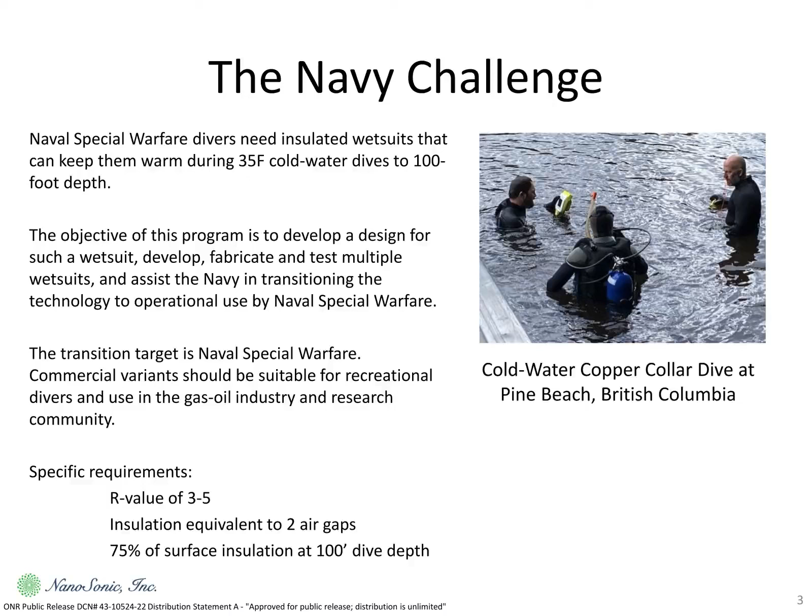Our specific requirements are an effective R value, thermal insulation equivalent to 2 air gaps within the suit, and an insulation value at 100-foot dive depth set equal to about 75% of that at the surface.

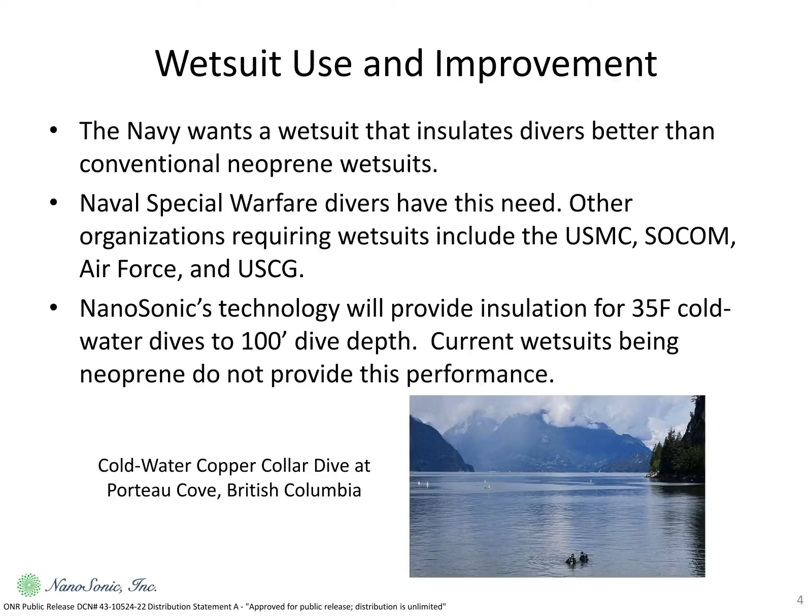So Navy divers need wetsuits that insulate better than conventional neoprene wetsuits. Navy Special Warfare divers have this need, but other organizations requiring wetsuits include the Marine Corps, SOCOM, Air Force, and the Coast Guard. Our technology, NanoSonic's technology, will provide insulation at 35 degrees Fahrenheit at dive depths of 100 foot. And the picture that you see there is several Copper Collar LLC divers in British Columbia, and in the background you can see that they are diving in glacial runoff water, very cold.

NanoSonic's solution to this problem has been to develop a special thermal array material that we incorporate into the wetsuits. The wetsuits are fabricated by a company called Wetwear in Florida, and you see in the picture one of the Copper Collar LLC divers being fitted into one of several of the wetsuits that have been fabricated by Wetwear engineers.

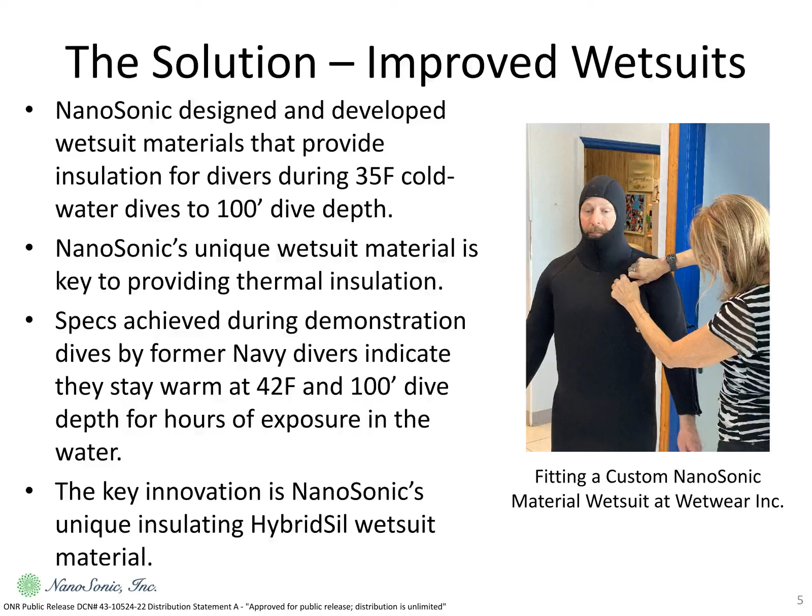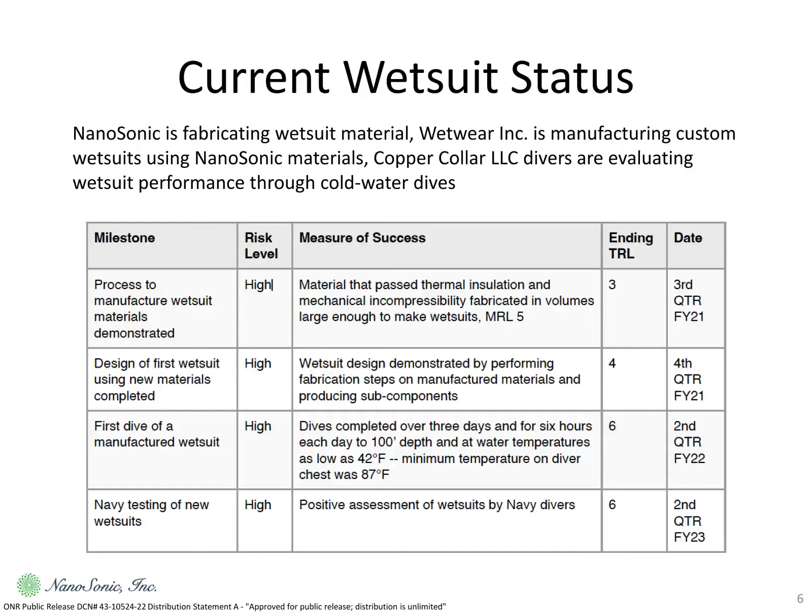Our current status on the program is that we are working with Wetwear Incorporated to manufacture the suits. NanoSonic is providing materials that go into the suits, and Copper Collar LLC divers are evaluating wetsuit performance through a series of cold water dives. And you see that tabulated in the graph below. We are in our 7th iteration of wetsuits. We're currently fabricating a set of 8 wetsuits that will be tested in the next few weeks.

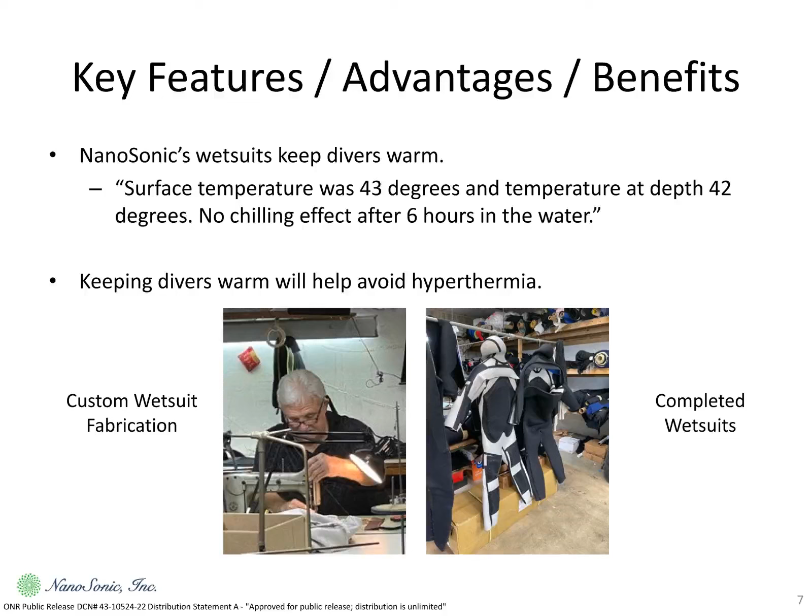The key feature of the wetsuits that are fabricated on this program is that they keep divers warm. And we've included a quote from one of our Copper Collar LLC divers who said, "Surface temperature was 43 degrees and temperature at depth was 42 degrees. No chilling effect after 6 hours in the water." And the pictures that you see, the left picture is custom wetsuit fabrication using NanoSonic materials at Wetwear. And on the right, you see 2 completed wetsuits for 2 Copper Collar LLC divers.

NanoSonic's transition plan is straightforward. Beyond phase 2, we need to increase our ability to fabricate the HybridSil wetsuit material to supply Wetwear. And Wetwear will fabricate the wetsuits and sell them. Wetwear's broader customer base includes law enforcement, commercial, industrial, and recreational divers.

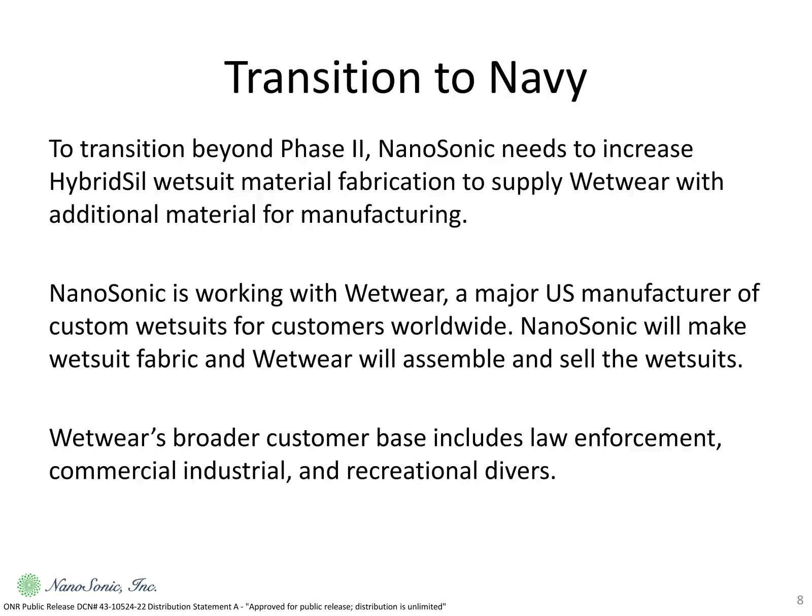Our market analysis has been straightforward as well. Wetwear is one of the few U.S. companies that manufactures custom wetsuits. In this case, they're manufacturing custom wetsuits with NanoSonic's materials. Major competition likely comes from inexpensive wetsuits that are not manufactured in the United States and that provide negligible thermal insulation, certainly not at 100-foot depth and 35 degrees Fahrenheit.

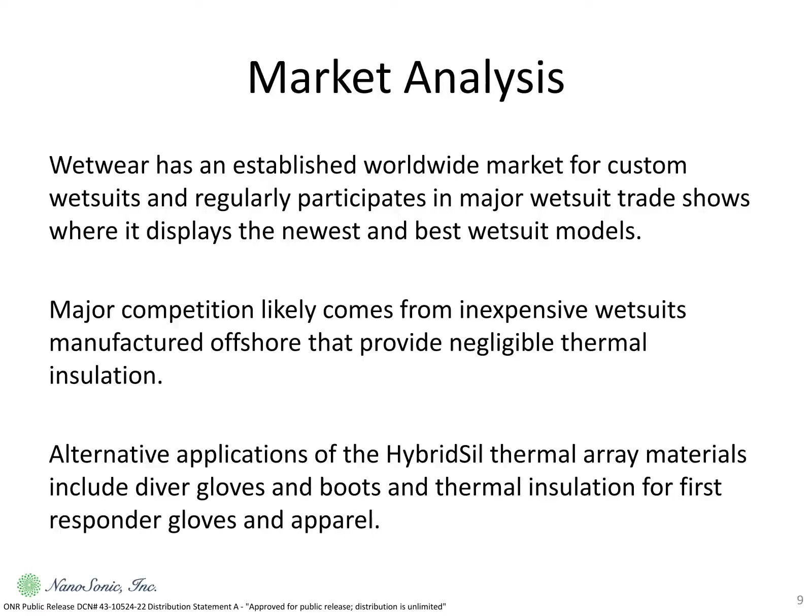Our transition requirements first need Navy divers to evaluate the performance of the suits during a number of dives. Further development and testing and an increase in our manufacturing capabilities will likely require a possible phase 2 option program. And secondary acquisition paths could include direct purchases of wetsuits by a number of government organizations.